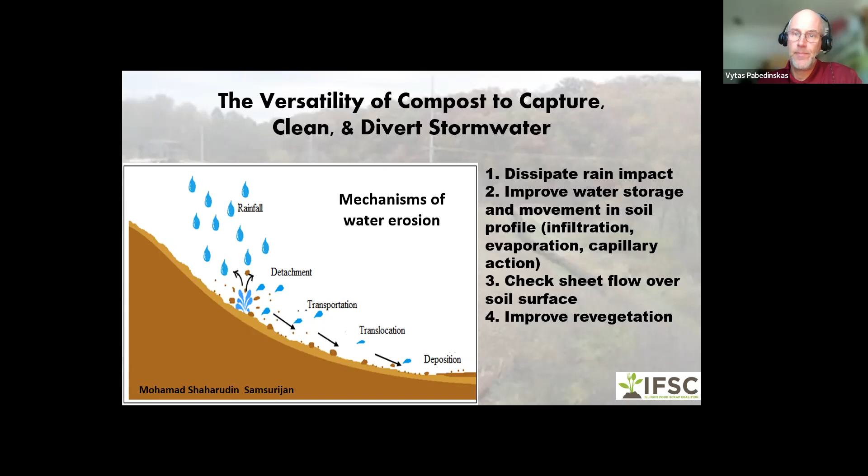So compost is a complex material that provides physical, chemical, and biological means of filtering water. So how does compost filter water? It can physically trap sediments in pore spaces of varying size. It chemically binds and adsorbs pollutants such as metals, organic and inorganic compounds, as well as nutrients.

And the biology of compost, which means the microbiology, comprises a complex community of microbes which can break down many of the organic pollutants that end up in our soils. Studies have shown reduced bioavailability of metals when the soils have high organic matter content. The opposite has been observed in industrial areas that have been changed over to residential or public spaces.

So when these soils are subject to compaction and degradation, the soil particles containing metals like lead, arsenic, and chromium don't have the glue of the organic matter to keep them together and can become airborne as dust to be breathed in or carried into homes or on clothes or through windows or transported by sheet flow during rain events.

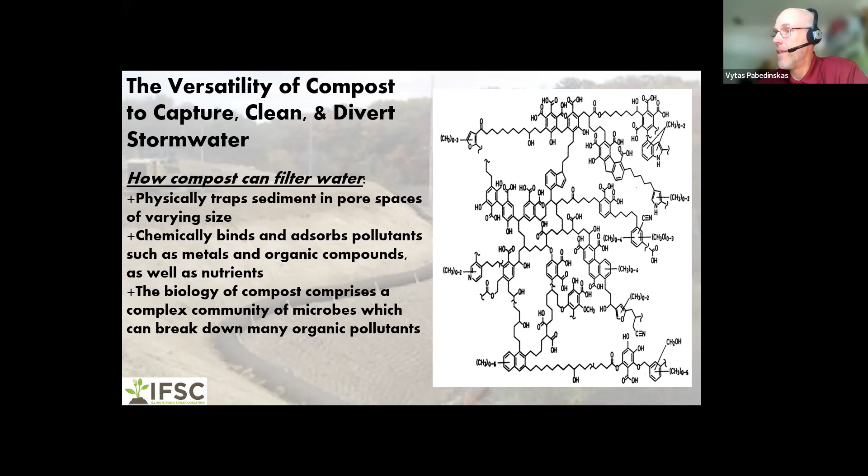And what you see here is basically an illustration, a representation of what the structure looks like of compost. It's fairly chewed up and assembled again by the microbes that are in charge of the degradation process.

So this graph comes from a 2-day workshop put on by Caltrans and CalRecycle back in August of 2020. The presenter was Dr. Britt Faucette of Filtrexx International. So compost can be screened and separated for particle size. That means you can get larger chunks or you can get smaller chunks.

Application and purpose will dictate whether you want more flow of water, which needs a larger particle size, or more filtration, which requires a smaller particle size. The scale on the bottom is in inches. So it ranges from, on the left, 1/4 inch all the way out to 2 inches in size, which is more like a mulch.

Here, Dr. Faucette has determined you have the optimum performance of flow rate and filtration capacity at a 3/4 inch particle size. In the application, it must be determined if max water needs to be captured or simply slowed down, like on the hill slope.

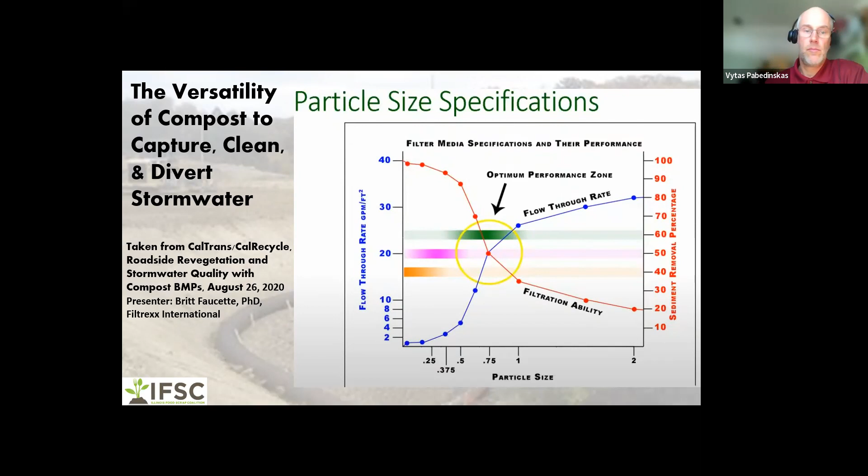Okay, so here is a sketch of locations where compost can be used. I tried to use different textures in the polygons to show different relative compost particle size needed in the different areas of the slope. The goal of compost is to get as much water to first infiltrate as the water hits the ground during a rain event, then slow down, divert, capture the water as it travels overland to its destination.

The size of the arrows are a qualitative way of showing what relative amount of water goes into the ground compared to what is still moving along the soil surface. Larger particle size compost on the summit will protect soil from disturbance and detachment, but maximize infiltration. If the particle size is too fine, then infiltration will be slowed and water can collect and sit on top of the soil instead of seeping in.

A compost sock right at the shoulder of the slope would have fine particle size compost to keep water and sediment up on the summit, interrupt the water's path, slow the water's speed over the shoulder, minimizing the formation of gullies and rills. In the middle of the slope, compost socks and berms can provide backstops, rooting medium for vegetation.

Plants on the slope become a living obstacle to overland flow, and their roots create pathways for water infiltration. At the bottom of the slope, swales or catchments can be built with compost as a component, allowing for rapid infiltration as well as filtration of pollutants. Again, context and purpose is important when selecting the compost.

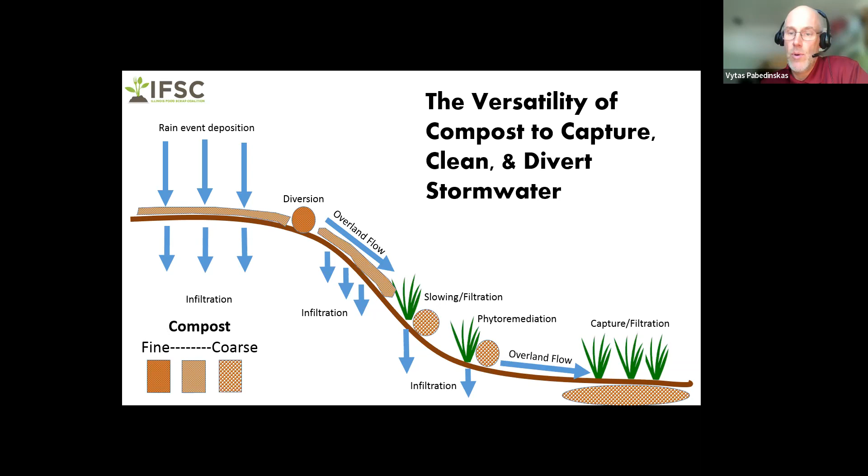The next two slides provide data from several studies showing how effective compost is in limiting water runoff and capturing whatever is carried away in the water. Here we have studies by Dr. David Crohn, who looked at soils on slopes treated with compost blankets after fire damage.

So several treatments of compost were used, which included coarse and fine particle sizes, that's indicated by the C and the F prior to the number of the treatment, as well as a depth, 1 or 2 inches, and whether it was incorporated as well. Biosolids were also included in this study.

So what is a compost blanket? A compost blanket is basically a layer of compost usually applied with a blower truck onto the surface of the soil. And this trial took place on the UC Riverside campus in California, and winter rain was the source of the moisture, and that's identified by the dates.

So the dates indicate the days that it rained, and when they went out to the trial site to measure the amount of water flowing through and the amount of total suspended solids that snuck through the trial site. So the control is bare soil, and soils affected by fire can become hydrophobic and get washed away during heavy rain events. This would be the familiar scenes of mudslides on national news that follow severe rains that fall on fire-affected slopes.

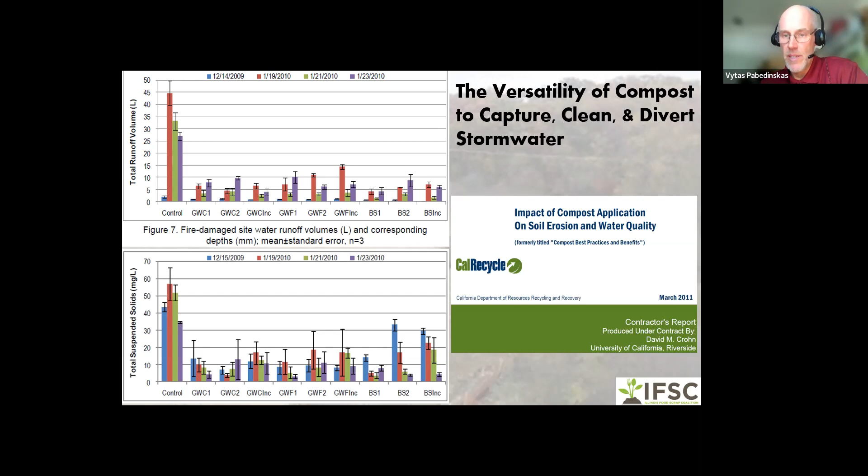And in this study, it shows that very little is actually coming off from the compost material itself, and it does a lot more to capture as opposed to contribute to the amount of total suspended solids. The information for this slide was taken from the Impact of Compost Application on Soil Erosion and Water Quality. It's this 170-page document prepared by Dr. Crohn of UC Riverside for the California Department of Resources, Recycling and Recovery. It's a very helpful document for developing BMPs. So the message here is get soil covered.

Here, Dr. Faucette looks at compost blankets compared to other erosion control practices like straw wattles, nets, and tackifiers. The item highlighted in red in the upper right chart is a 2-inch compost blanket, which had some of the best results for varying rain quantities. The bottom chart shows how effective compost filter socks are at pulling solids, nutrients, coliforms, metals, and organics from the water. There's concern that compost may release some nutrients into the water it is trying to capture, but the numbers show compost captures much more than it contributes.

Consider the earlier slide, the complex structure of stable and mature compost that resists breakdown. So Benjamin later will speak about stability and maturity in compost and how it has an impact on compost quality. Again, soil should not be left exposed. It needs to get covered.

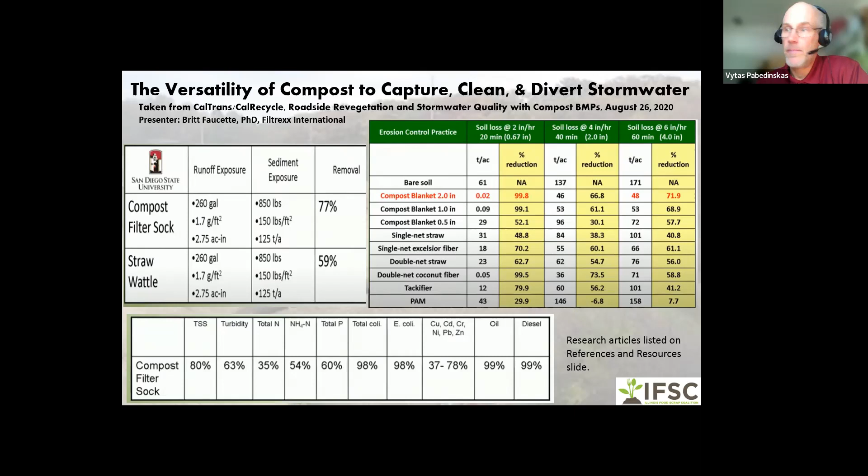Oftentimes seeds of grass or native plants are mixed in so vegetation can grow and help with the stabilization of the soil. The compost improves seed germination rate and decreases time to germination, which means more plants growing faster, getting established, and holding the soil on the slope. Engineered slopes don't have much organic matter that young plants need to survive, so plants have a harder time establishing.

Anecdotal evidence from Caltrans roadside projects speaks to the lack of weeds and invasive species establishing compared to the natives that they put into their projects. And this is another worry a lot of managers have when considering the use of compost. They think that the addition of a nutrient source will lead to the proliferation of weeds. But like I said, anecdotes from Caltrans projects show that when they have included native plants and incorporated the seeds into the compost itself, they outcompete the weeds.

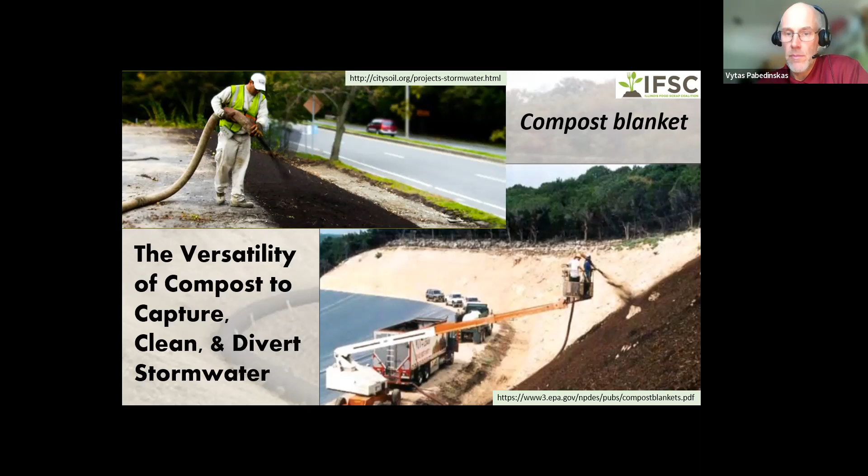So here is a study being done in England, very similar to the UC Riverside trials mentioned earlier, where runoff is captured in troughs at the foot of the slope. And there are sensors to measure volume, and samples are collected and sent to lab for testing. So here is a real earnest effort to do more than just offer anecdotal evidence for the effectiveness of compost in capturing slope runoff. They're getting some real serious numbers here.

PAS 100, which is at the top, refers to the UK's classification of compost quality. So BMPs need to be developed from the results of rigorous testing and utilize a consistent quality product.

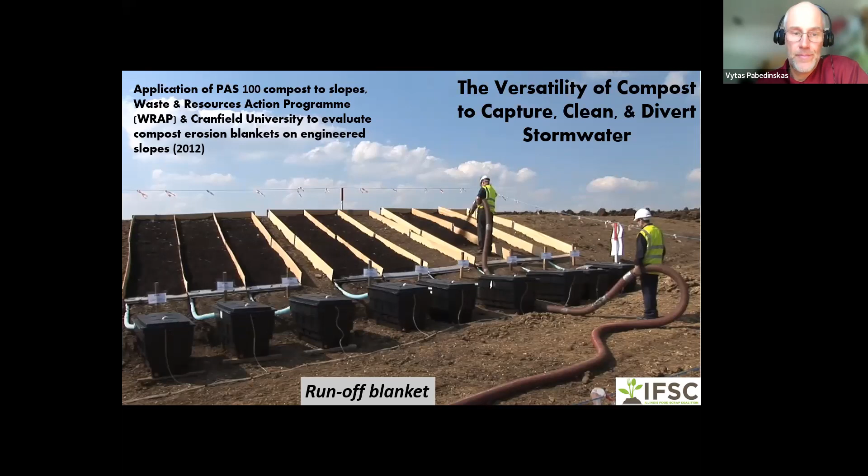Compost can also be shaped into a berm to be a barrier against sheet flow. A special attachment to the blower hose creates a trapezoidal shape. Again, seeds can be incorporated into the mix and plants will grow in that material fairly easily. These plants will send roots through the compost matrix, creating a stronger barrier. Water will pass through, but much of the water and sediment will be captured on the high side of the berm. This is ideal for slope interruption or bank stabilization.

So in the top two images, you can see that this is being utilized near a stream. What isn't pictured is the roadway that is nearby. The impermeable surface of the roadway sheds water to the soil surface adjacent, whose capacity to absorb water during a rain event is overwhelmed. So here in this application, an actual barrier is more appropriate than a blanket.

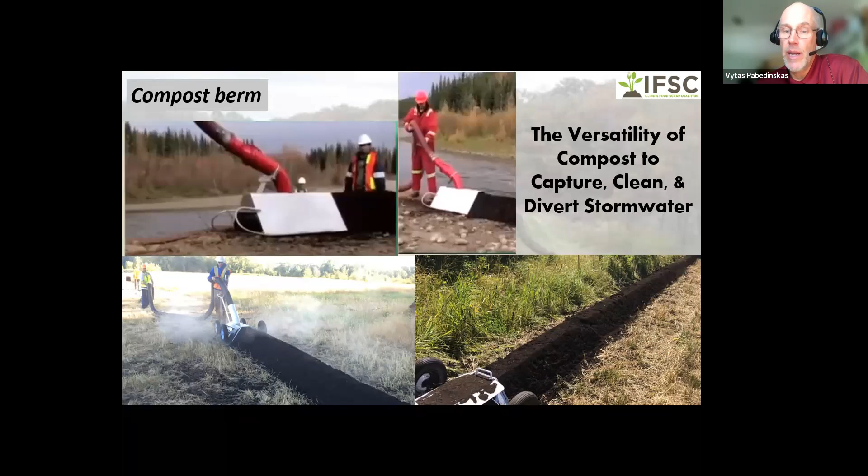When sheet flow is more aggressive and water volume is larger than average, a compost sock is put in place to perform the function of a silt trap and filter. Particularly useful where a nearby construction project has created exposed soil. In these three images, you can see the buildup of the sediment next to the sock, like the smooth areas right here, and we got some ponding happening and some collection of silt right there.

The sock holds its shape. It stays flat to the surface of the ground, so there is no loss of integrity underneath the compost sock caused by undercutting action of aggressive water flow. Wooden stakes can be put through the center of the compost sock to give the structure additional stability without compromising its function. Compost socks are available in a variety of diameters. I'll give you more info on this later. And managers need to consider the on-site conditions to determine which diameter will work best to mitigate their stormwater issues on site.

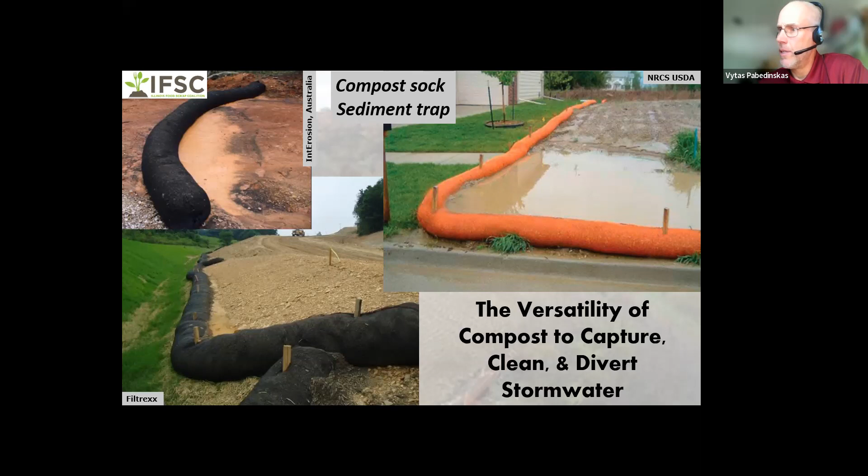So here the compost sock is acting as a slope interrupter. The faint green spots between the socks are seedlings planted to revegetate the slope. This example comes from Australia. Here compost socks of narrow diameter cut across the contours of the slope, creating protected areas for revegetation. A large berm acts as a final barrier, obstacle, or speed bump to prevent a washout or a gully at the base of the slope.

The planted seedlings need water, but its delivery needs to be regulated. Compost socks arranged on the contours may rob plants lower on the slope from getting adequate moisture for establishment.

So how do contractors know how to install compost socks? Here is a standard plan with technical specs for installing compost socks from Caltrans. Proper staking and securing overlap distance is part of the diagram. A contractor can reference these plans from a Caltrans spec book, as well as installation steps, mixing rates of materials.

Input from engineers in the field has prompted changes in the specs to omit lashing and to rely on staking. So lashing is basically using ropes to secure the compost socks to each other. The lashing was carried over from the practice of utilizing straw wattles. The assumption was that the compost socks would behave in the same way straw wattles would when exposed to significant sheet flow on the slope. So when the project managers saw that that was not the case, they eliminated this step, which saved time and material on the project. So you're ultimately saving money.

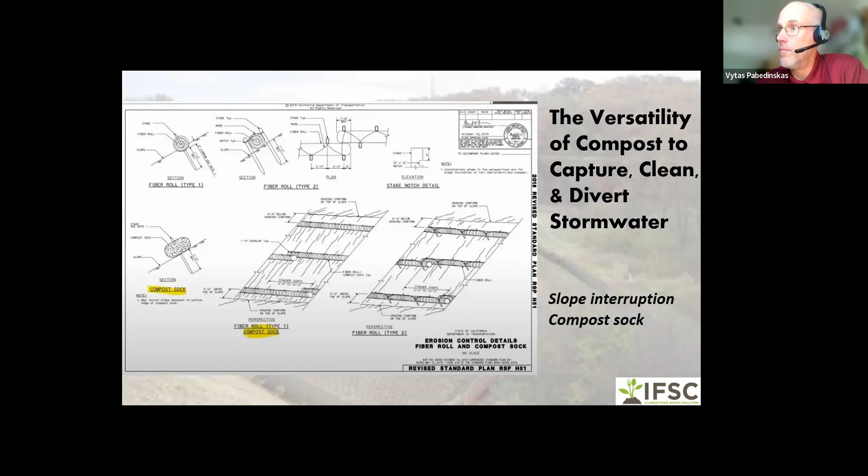So again, with straw wattles or fiber roll, the lashing was to keep the heavy water flow from washing out the material. But because compost socks are more stable, heavier, they didn't really need the lashing. So it was kind of a redundancy that they could eliminate. So again, that saves money. You don't have the labor costs of trying to get that lashing put into place, and you're not using that material in the project itself.

All right, so the left picture here illustrates a large diameter compost sock following the topographic contour of a slope. Above the contour, work is still in progress. Below the compost sock, the slope is graded and ready to grow vegetation. The slope interrupting compost socks are nearly 24 inches in diameter. So these are fairly sizable compost socks here. This slope has only two compost socks, at the slope midpoint and at the slope foot. And you can see that here in the background of the picture.

The picture on the right is compost seeded with vegetation. At the top of the slope is a roadway. So the plant roots help keep the compost on the slope. The compost helps the plant get established. Both combine to keep water on the slope and clean the water before it enters a stream on the right edge of the photograph. Several rows have been put into place on a short slope due to the volume of water coming off the roadway. Since there is a roadway, there are pollutants carried on the water that also need to be mitigated. This image comes from a project in New Zealand.

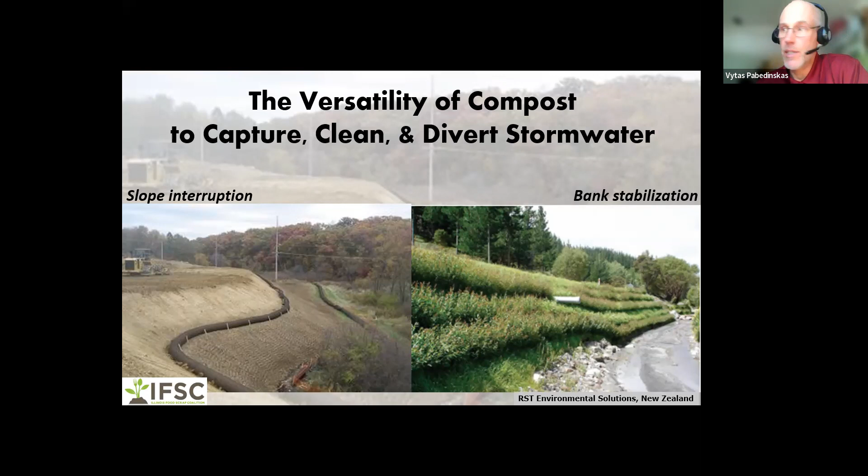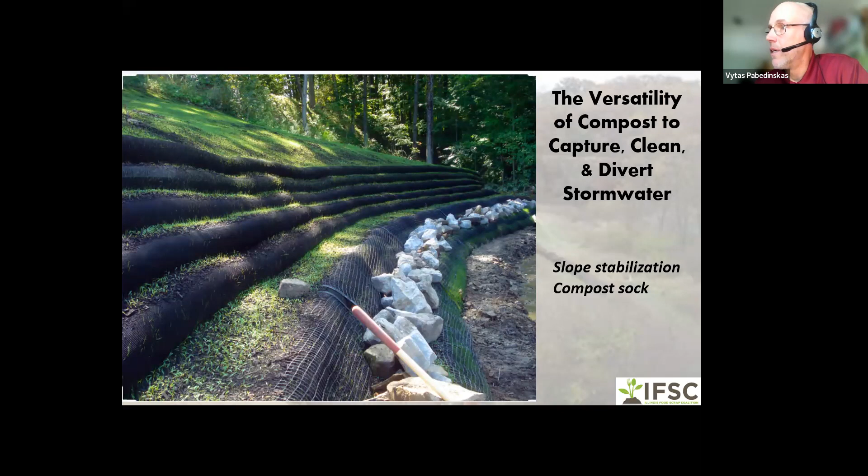So as the slopes become more challenging, designers increase the number of compost socks. Again, plant roots help keep this compost in place, and then also incorporating reinforcing geotextile in the project helps keep the compost and soil in place. So here, compost is literally building a slope.

So there are many options available for compost socks. A quick summary of compost sock benefits would be the biodegradable fiber of the sock itself. It can be left in place with no removal or disposal cost. There's no trenching necessary or rope lashing. It can be built for high flow or high removal, so allowing a lot of water or capturing a lot of water. There's a range of sizes going from as small as 5 inches in diameter all the way up to 2 feet. And it can perform a range of functions such as perimeter control, slope interruption, act as a check dam, or sediment trap.

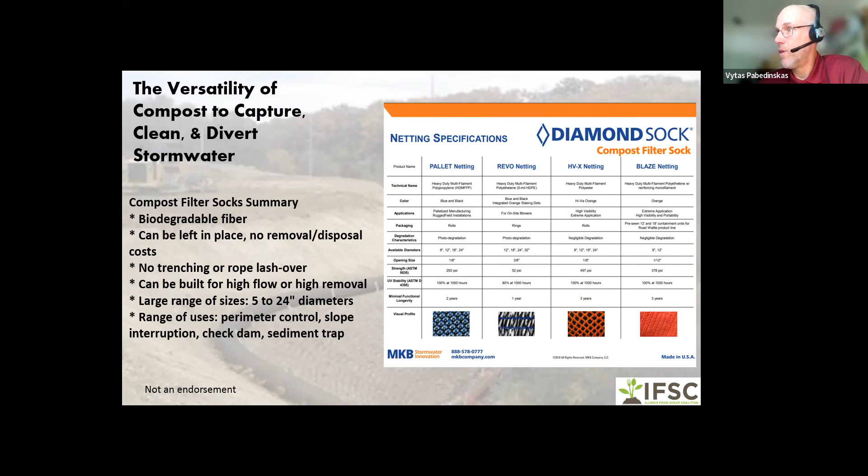There are limitations to the type of compost that can be employed by the blower truck. Moisture content and particle size have to be considered. If compost is not clear of debris or stones, the blower system can experience significant damage. So this is not to highlight the limitations of the blower, but rather emphasizing the importance of the sourcing and the quality of the compost that's going to be utilized in the project.

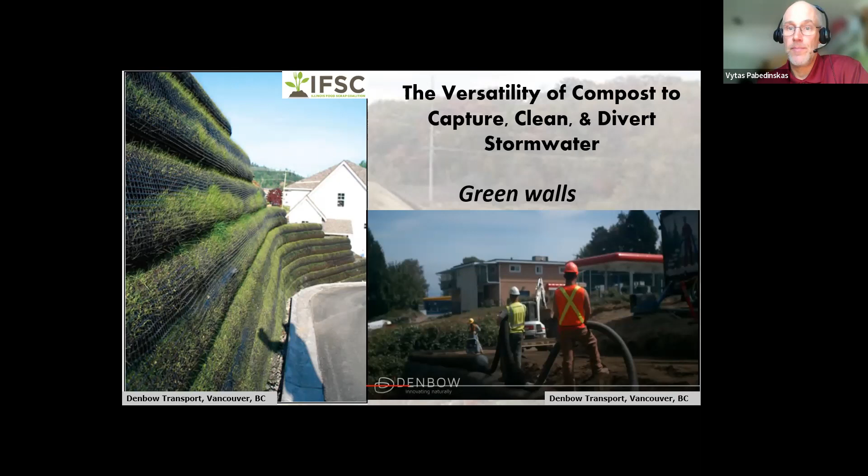So now we're getting down to the bottom of the slope, areas where water collects and needs to quickly infiltrate. Again, relying on Caltrans, here are specs for 3 types of catchments. Each utilizes compost in some capacity. DPPIA stands for Design Pollution Prevention Infiltration Area. So currently there's no information on service life, but 15 years is the hope. This of course depends on the sediment load. So California and Texas currently have data for water in and out of these installations, so they know what's coming in and what's coming out. They have captured that, checking how much pollution and sediment are removed by these catchments.

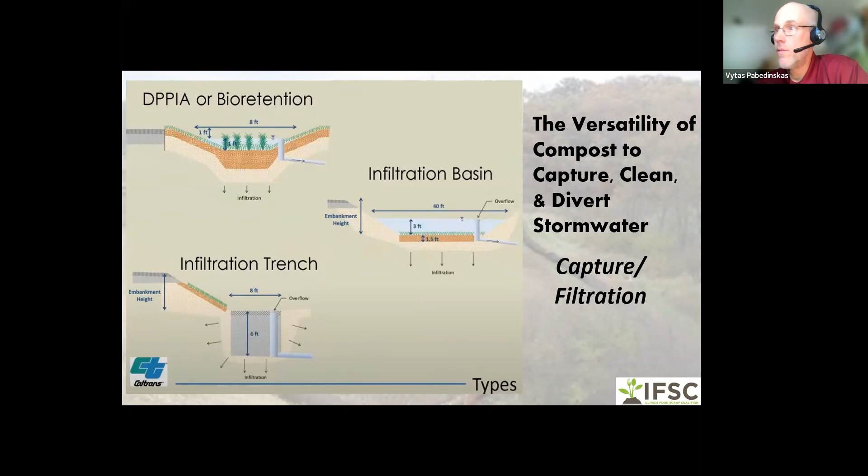So here you have a Caltrans project in a parking lot. The vegetated area has a soil profile amended with compost. Whatever water does not infiltrate in the green space travels by sheet flow to the trap in the stony area at the bottom of the picture. The left picture is at the time of construction, and the right picture is sometime after the establishment.

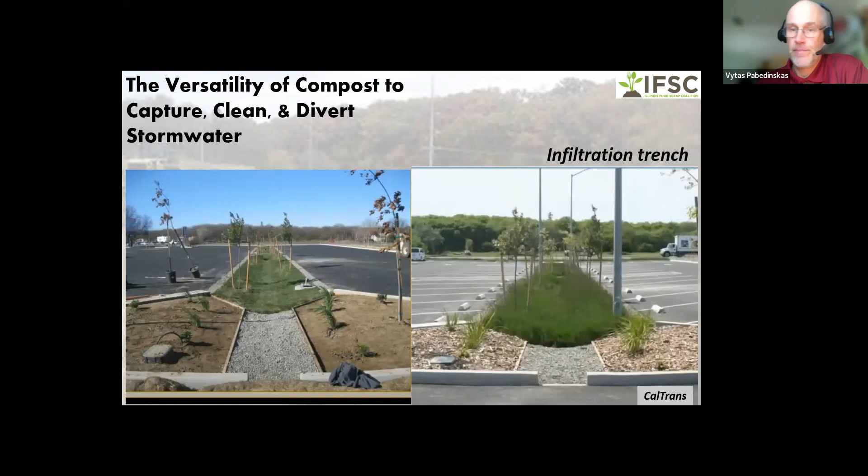So there are resources available from federal sources that can recommend BMPs. The left coming from the American Association of State Highway and Transportation Officials, U.S. Army Corps of Engineers. And the right comes from the Natural Resources Conservation Service. And these are specific to compost sock, filter sock utilization.

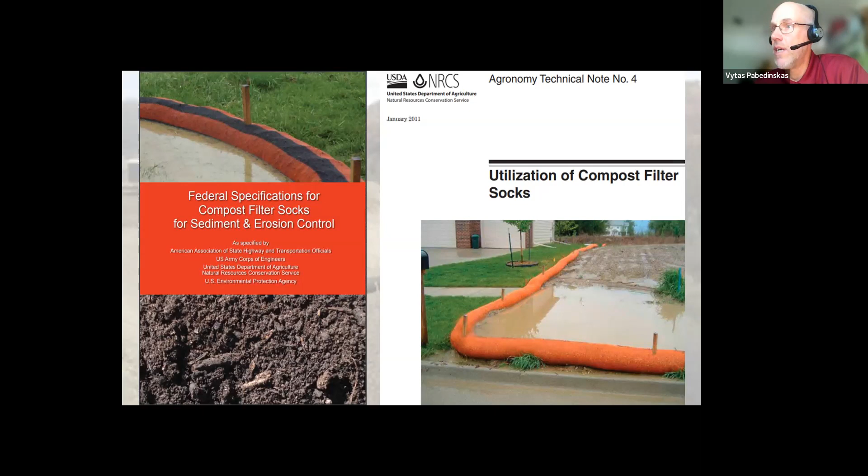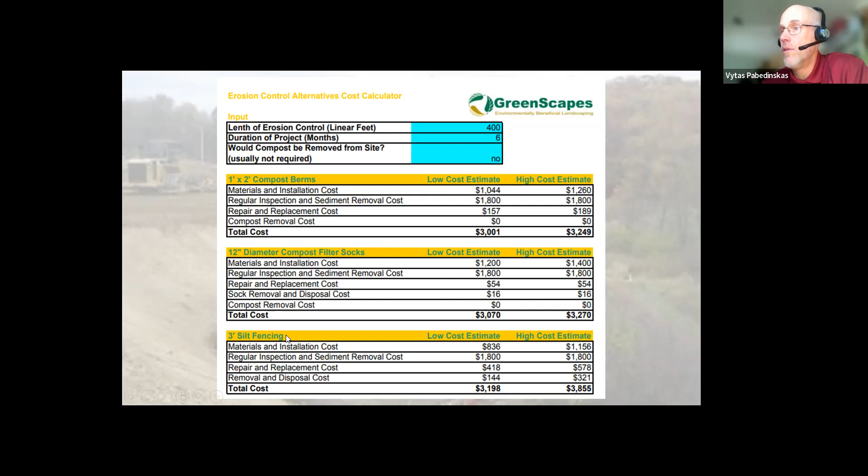So here they basically break down on the low end and on the high end what it would cost to run things like a 1x2 foot compost berm, a 12-inch filter sock versus your standard or conventional 3-foot silt fencing.

Okay, can you see that all? Okay. Hi, thank you very much for having me. It's a pleasure to be here.

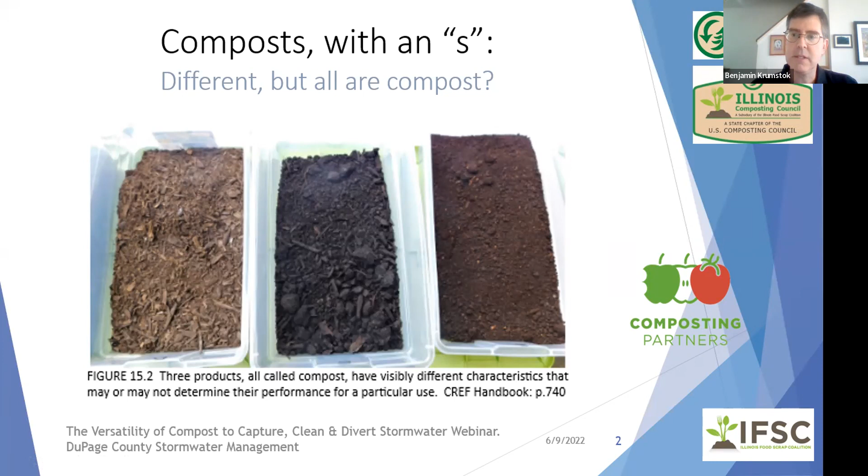So these are all composts. They have different feedstocks, different materials that make up those products, different durations of composting, and then the result is a different product with different characteristics. Having said that, compost is not mulch, and mulch is not compost. So it's important to understand that compost is compost, but compost is composts, plural.

When it comes to getting a handle on quality, what is a quality compost? The answer is there is no single definition of what is a quality compost. It really is dependent upon the intended use and the location of that project. So the source soil or the project soil is important. And what is a wonderful compost for one particular application in a setting with a particular soil profile may be the wrong product for use in another.

So as you consider which compost to purchase, I'll ask you to consider a few things: intended use, the goal, the effect. Are you doing a stormwater mitigation project where the sock is appropriate, or are you going to remediate a field? It could be your public assembly point. It could be a park district property where the soil has just become green concrete and you need to remediate. Those are different applications. They're going to take different composts, and it's going to be valuable to think of that in advance so you get the right product.

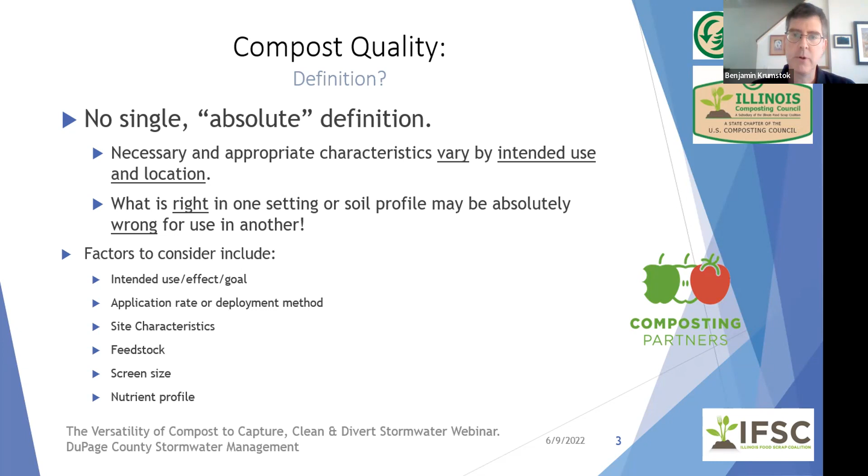Again, I said that compost is not mulch, and it's really important to know, is this compost or is this something that looks like compost? The critical question here is, has the composting process been performed completely and properly? There is an actual science to composting. There's a microbial process. This is a degradation by biology, and you can't rush all of it. You can encourage some of it, but if you don't take it through the complete process, it's not compost. And if it's incomplete, it has some potential downsides for you.

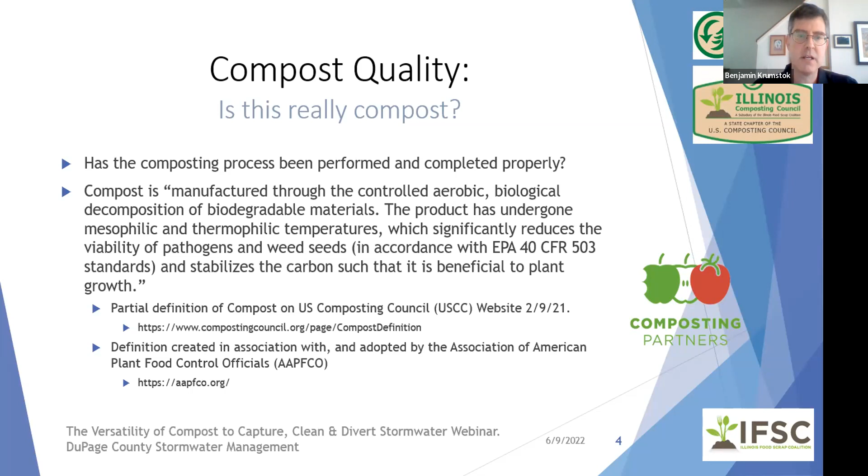So the U.S. Composting Council does have a definition of compost. I'm including it here. It's something that was created in association with and adopted by the AAPFCO. If you're not familiar with them, that's a national association that all 50 states have representatives to, and they're the ones who are regulating fertilizers at large. And this is a true definition of compost.

So which compost is the right compost? It's a trade-off. There are different characteristics to the compost, and depending upon what you're interested in, you have to make a decision. 3 buckets: safety and risk, the product itself, what herbicides might be residuals within that compost, what trace metals, so what nutrients, what nutrient profile, aesthetics.

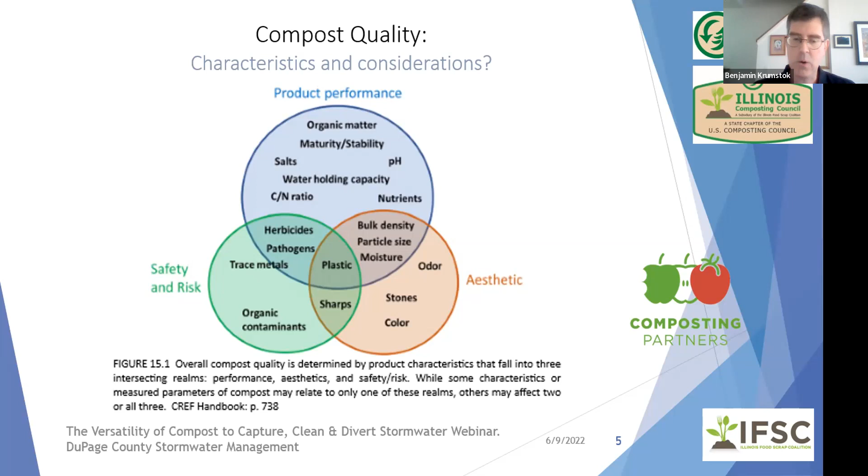You know, can you tolerate a few stones that get through the screening process, or is that a deal breaker? In a sports turf context, maybe that's a deal breaker. In a roadside project, not applied by a blower because you don't want to damage the equipment, maybe those stones are acceptable. And then what is the profile of the soil that you're working in, and what is your ultimate goal? So you're going to have to balance.

And just to make it dramatic, these are different applications, and you'll see with 4 checks being the most important criterion and 1 check being the least important criterion, depending upon what your project is, different profiles, different parameters are more or less important. So in the erosion control context, that's the second line, the nutrient content isn't really an important consideration. If you take it to the agricultural context, it absolutely is. If you take it to a turf grass context, it absolutely is.

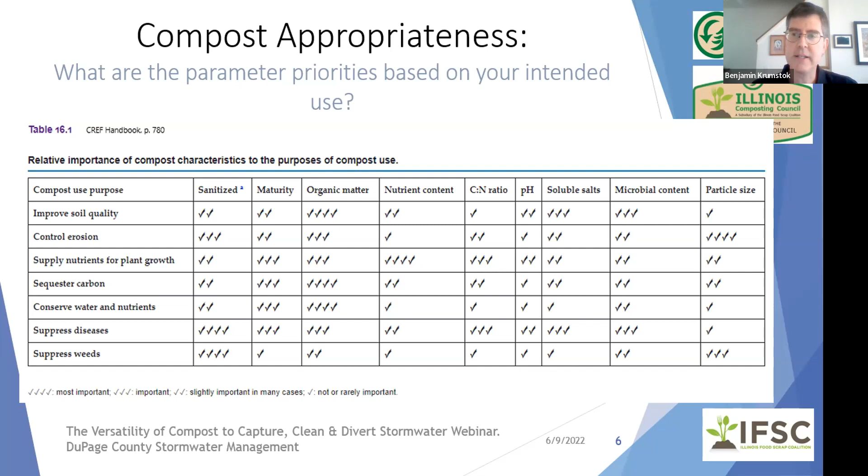So how do you know you're getting high quality or properly manufactured compost, and getting information about what that compost is? So I'm brand neutral. I'm going to share the U.S. Composting Council's Seal of Testing Assurance program, because it is the national program that's available to help you find a product that has been tested appropriately and guaranteed.

Having said that, if you have a composter who's doing good work and submits their material to testing, this USCC STA is not mandatory. You can use those same labs or other high quality labs to test the compost, and you can be guaranteed that you're getting a good product if they match the profile that you're looking for. So it's mostly an information resource with only 2 pass-fail criteria.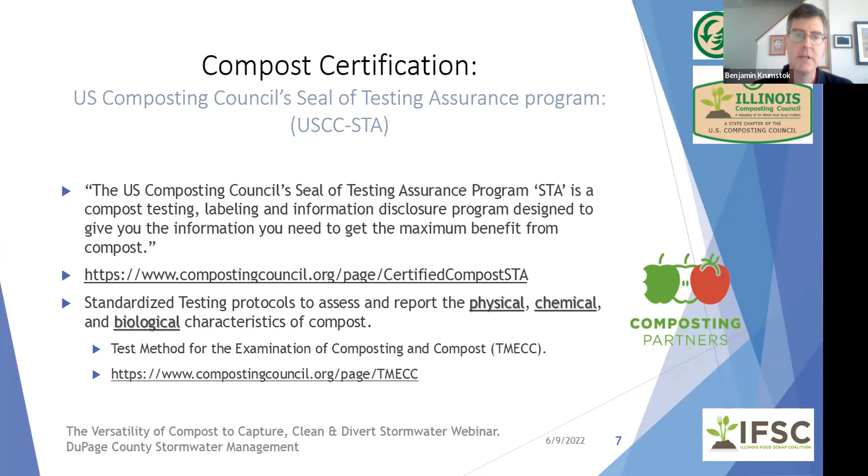And in this case with USCC STA, you're going to get standardized testing protocols and you're going to get standardized reporting. So they're looking at physical, chemical, and biological compost characteristics, and that's important. The USCC created a test method, TMECC, and that's a standardized test method that's applied and used by all of the different participating labs. What you get from a composter is this compost data technical sheet, the CDTS.

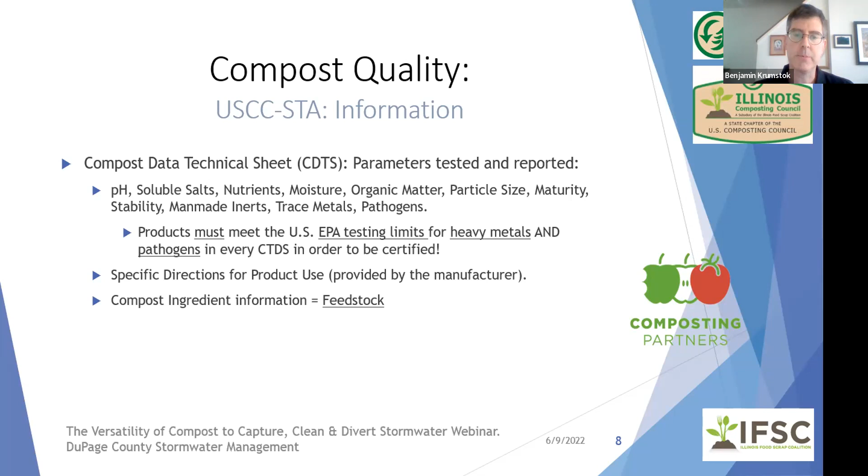There are a number of parameters that are reported. And again, except for 2 parameters, it's all information, not pass-fail. You do have to meet US EPA testing limits for heavy metals and pathogens. So that is going to be a pass-fail. And then you get a second sheet, which includes specific directions for the product use and information about the feedstock. So this is the 2-page document.

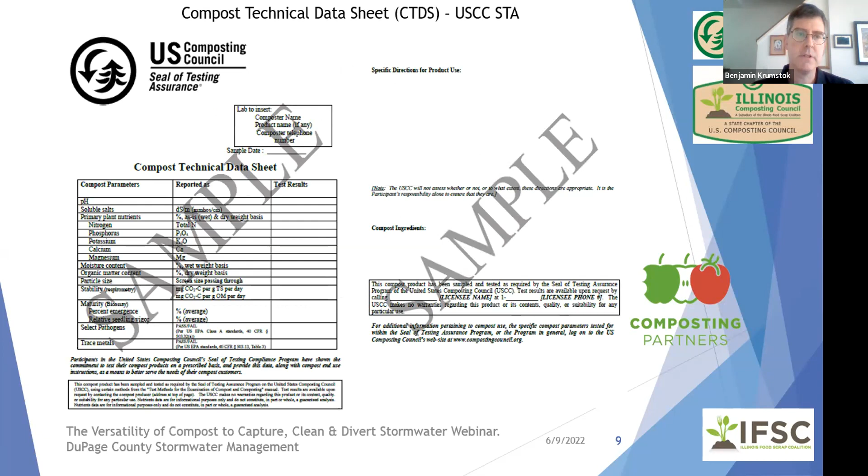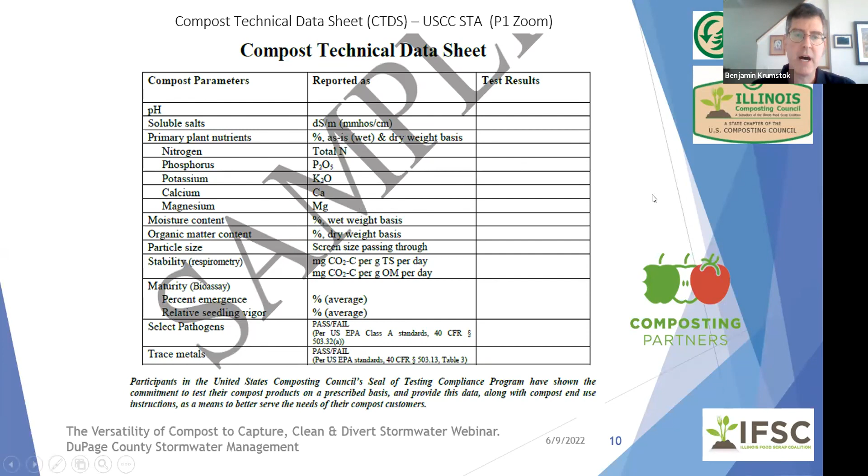This is what a sample USCC CDTS looks like. This is a mag of the information on the first page. You have the parameter reported as, so you have your units and the results. And again, if you look down to the select pathogens and trace metals, here it's a pass-fail with those particular standards set, and the rest is reported in units, but you're going to be able to determine if this compost meets the profile that you're looking for or not based on satisfactory testing.

Specific directions for product use, there's no rule about that, but the composter might tell you this particular product is ideal for stormwater management, or it might be ideal for agricultural uses, or it might be ideal for turf management. There's opportunity for variability in there. And then the compost ingredients, they'll share what feedstock went into this. Is this manure? Is this grass? Is this food scrap amended?

Important information, there are two bits of vocabulary I want to share, stability and maturity. So they're both difficult concepts for people to grasp. I've struggled with it for a while before I think I've finally gotten a handle on it, but they're critical. So stability is the state or stage of organic decomposition. Think about it as the degree of resistance of that feedstock, of that core organic material that you put into the pile, to then continue on the pathway of decomposition. A highly stable product is very unlikely to undergo further decomposition. So it's basically finished, right?

You can see a measure or representation of stability in biological activity. If you think of the microbes that conduct the composting process, they breathe, they release CO2. If you have CO2 emission from a pile that drops off, that's likely an indication that there are fewer microbes because there's less food for them to interact with, and therefore they are absent. The process is completed, and there's a test called respirometry.

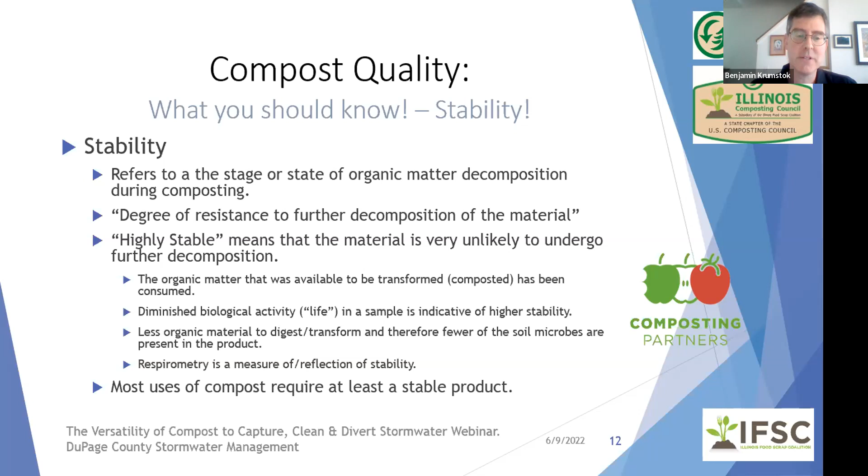There we go, which is the test of stability, respiration measurement of CO2. And most compost uses require at least a stable product. Maturity is a little bit more difficult to understand. And here it is a measure of completeness of the composting process.

But what it's actually telling you is, are there almost what could be considered transitional compounds within the compost product? Free ammonia, certain organic acids that are part of the transition from your feedstock to your finished, stable, mature compost product, they're in there. A mature compost will not have ammonia or a good amount of ammonia in it.

And that's important because some of these organic acids, the ammonia, they can actually be phytotoxic. They're going to kill your plants if you try to lay them down when they're immature, and they can also have odor. So you want to be aware of maturity here. It may not be necessary in all applications, but most require at least a mature product.

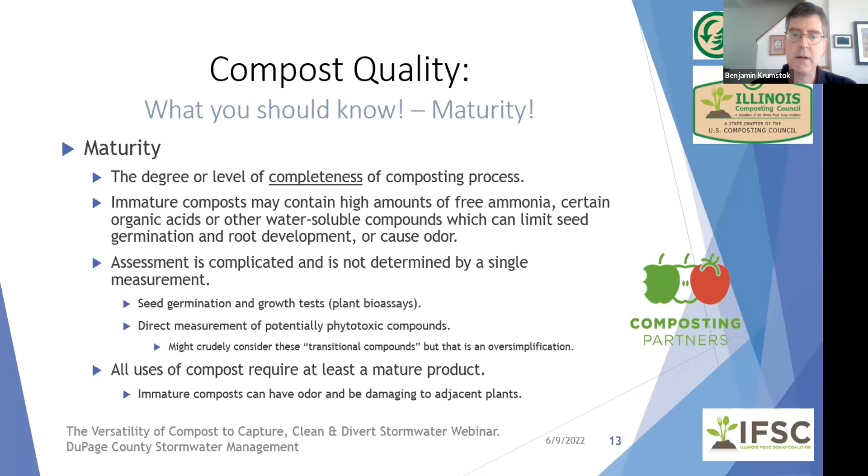And the one single most important idea that I want to send you home with is if the vendor you're speaking with will not provide up-to-date compost testing results, then you're unlikely to be purchasing or using quality compost.

The people that Vitas and I are in contact with and in relationship with, they're responsible and they're testing their products so that you have a good experience and want to come back with success stories and understand the value of the product. So if they won't tell you, be suspicious and potentially push harder or walk away.

I'll just take a brief moment to mention organic versus Organic. People often ask, do I need organic compost? What is organic compost? So all compost is little o organic. It comes from organic matter, but only some is capital O Organic. So the capital O is organic certified or required for those farms and other programs where they're using USDA National Organic Program guidelines. Most projects don't require capital O Organic.

If you're in a community where the residents are interested or concerned and want to spend the extra money, potentially, it may not be more expensive, it may be the same price. But if there's an interest in that particular product, then you may choose to do that to meet their interests. And what makes capital O versus lowercase o, it's this National Organic Program. They have a list of materials that are acceptable on organic farms and what is not.